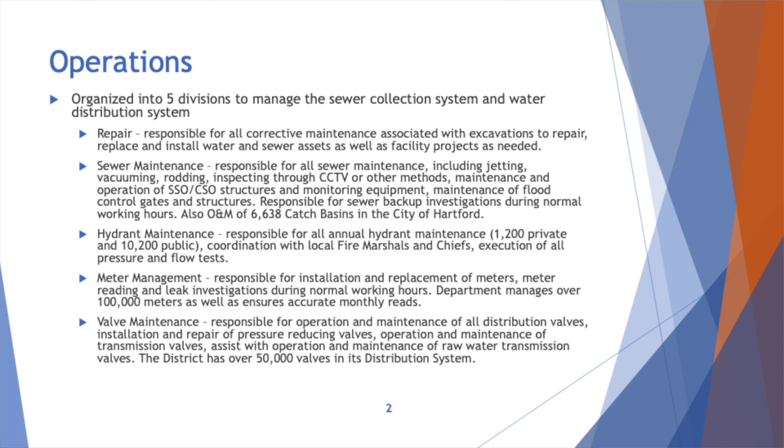Really, this is the critical component to our system. In the event that a break occurs, we need to be able to shut that main down. They play a vital role to make sure we can get access to those valves. And we'll get into some of the repair work they've done and responses they've done, including the 54-inch break that we had to respond to this August on the side of I-84.

So quickly keep going here. Just a little history.

My personal background, started in engineering. I got lucky enough when Scott came on board as the chief operating officer, I took a position within his group. Part of this was he wanted to get a good grasp of what we were up against. This is when we were starting to come into our consent order and consent decree and our long-term control plan.

There was a lot of work being put onto the operations department, and at the time, our engineering department wasn't as organized as it is today. So a lot of this work was being funneled down to operations. We looked at what our requirements are to support the Clean Water Program, as well as all the CMOM responsibilities, which was maintenance that technically we should have been doing. That's how we got into the case with the consent decree and consent order.

Now we're doing it, we're managing it. A lot of operations is actually managing all of our contractors, before engineering took on that responsibility to support operations. So we looked at our pool of all of our union staff supporting this, whether it be technical staff, supervision, and labor staff, and we started seeing we're not going to be able to keep up with the backlog.

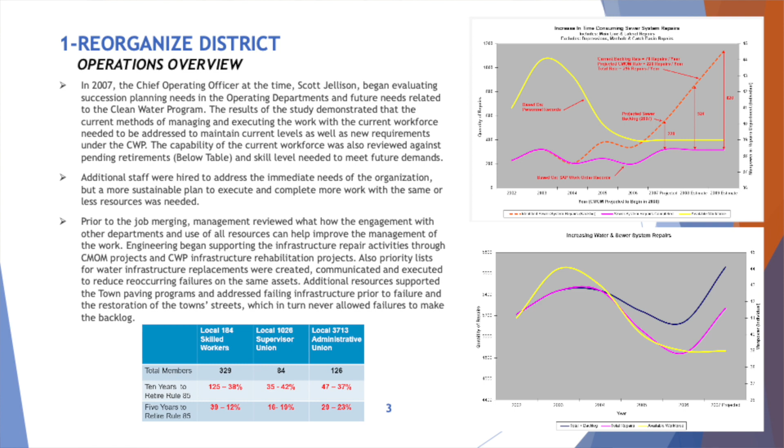So we knew we had to make a change. We did a full evaluation, and that's when we really looked at, hey, things have to change over a period of time. Keep on moving on.

As part of that, we did need to organize our staff. We had 5 divisions - you can imagine we had a sewer maintainer 1, 2, and a crew leader; hydrant maintainer 1, 2, and a crew leader; valve maintainer, gate maintainer 1, 2, and a crew leader; meter maintainer 1, 2, and a crew leader; customer service maintainer 1, 2, and a crew leader. So we had all these job positions that were essentially one-offs, so they could do only 1 or 2 things specific to those types of asset classes.

Under Scott's direction, we began merging those positions, working with the unions, negotiating, merging them into essentially a utility maintainer 1, a utility maintainer 2, utility maintainer crew leader, truck driver, and equipment operator. That's how we function within operations today. Every single one of those utility maintainers can do all the work within those 5 divisions in operations. Recently we brought in the command center as well, so there is a 6th division, but it's in a separate department.

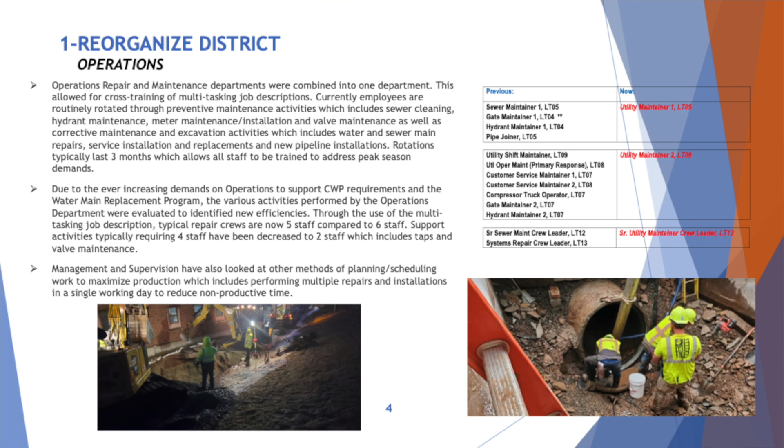When we moved forward with this, it was a substantial effort to get what we had - specific people working on hydrants - but they took the opportunity to expand their career, promotional opportunities, potential for pay increases. They moved forward, so we set up training programs to get every single one of those employees on track to take on those new skills and abilities.

Right now, what we end up doing, and it seems to be working out well - I talk a lot with a lot of the new hires - we put them on essentially a 13-week rotation. They go through our repair department for 13 weeks, learn the repair group, then they go on the maintenance side, learn everything about maintenance, and we keep them fresh.

In an event, we always pick up - like right around now typically, I'll knock on wood, we have a lot of water main breaks during the winter - so we have to fluctuate whether there's more crews available in the repair department versus maintenance, and some maintenance we can't do during the winter. So those are the types of things that we're always trying to work on, balancing the workload with the staff that we have.

Specifically, just recently, probably in the last 2-3 years, when John Fleming took the manager of operations role, we went through about 45-50 unique processes within operations, different variants. We looked at each one and said, is there a better way of doing this? We met with supervision and said, can we take a repair crew from 6 to 5?

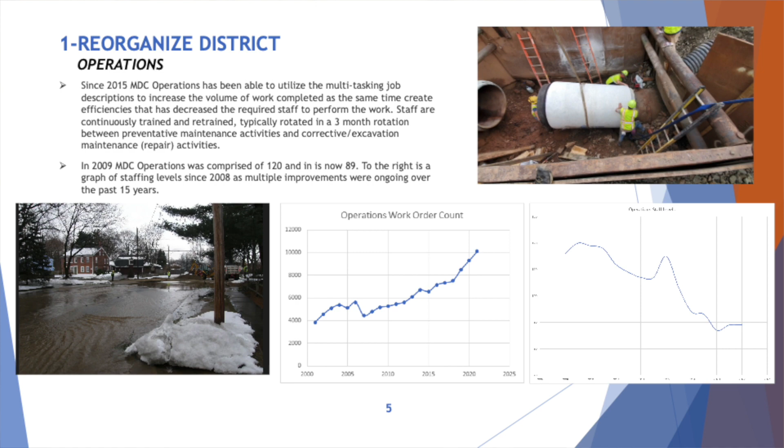We'll get into each of the divisions right after this, but I wanted to show this. As part of that, we started tracking the number of work orders pretty regularly. When Scott came in, part of that management study was to go back and take a look, and we've actually been able to increase the amount of activities we've done year after year, meanwhile driving down what we actually need on staffing. I think we've come to a point now where this is it - we're basically maxed out on how low we can go. Just wanted to bring this up as sort of a reorganizing.

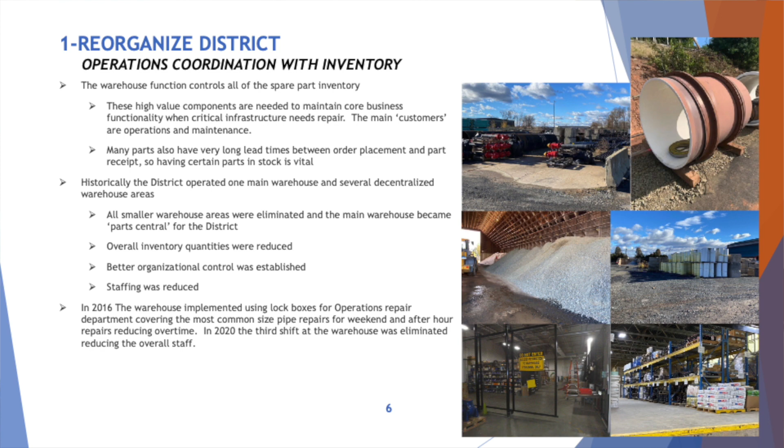Operations can't do this all alone, and we'll talk about the extensive coordination with engineering as well as the maintenance staff. We support, just as they support us, the plant maintenance department on our pump stations, whether it be sewer, water, or our storage facilities across our distribution system. One of the other areas is plant maintenance and the inventory group within maintenance. We've had a lot of challenges since COVID, and previously to that, we've made steady improvements on how we make sure we have the right materials to tackle the jobs we have, without the added challenge of our accelerated water program too. There's a lot of coordination between operations, our inventory group, and engineering to make sure this happens.

I mentioned failure events and responses, and I put a couple pictures in here. Again, it's 24/7 - we do have a department that is 24/7, our command center. They're the initial response, they do the assessment and make sure the right crews are coming in to address it. I put a couple examples in there - the top one was a liner failure. If we could run the video just real quick, just to give you an idea.

This is what the water was looking like. This we identified when the liner failed. These are our cameras going in and assessing the sewer at this location. These are our staff putting a camera device down the sewer, which is essentially like a remote control car with a camera on it. They can go up to it and assess what the damage is. We were using this tool out Friday night on Vine Street, assessing what the issues were, so we know how much pipe repair we have to make, what conditions we're facing, and make sure we're bringing out the right material to address it.

Hugely important - this one is our response, our assistance with a DEEP contractor following.

Recall, I believe it was end of June, early July, Connecticut Airport Authority had a PFAS release in one of their hangars, basically a fire foam release that filled up the entire hangar. It drained to our collection system in Windsor and reached the Poquonock plant. We were assisting DEEP's contractor this time, in the middle of the night. Our staff was out there with DEEP's contractors trying to assist, opening up manholes, making sure their equipment was there, as well as our treatment staff working 24/7 at a one-shift plant to make sure there wasn't much PFAS getting through. If there was a way to work with the DEEP contractors, we were there.

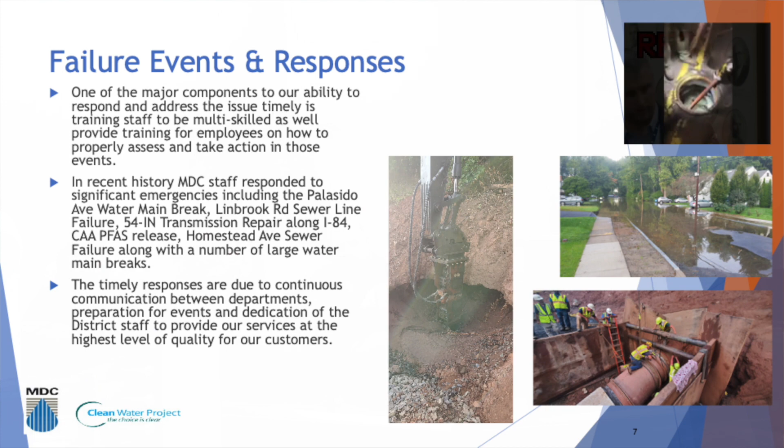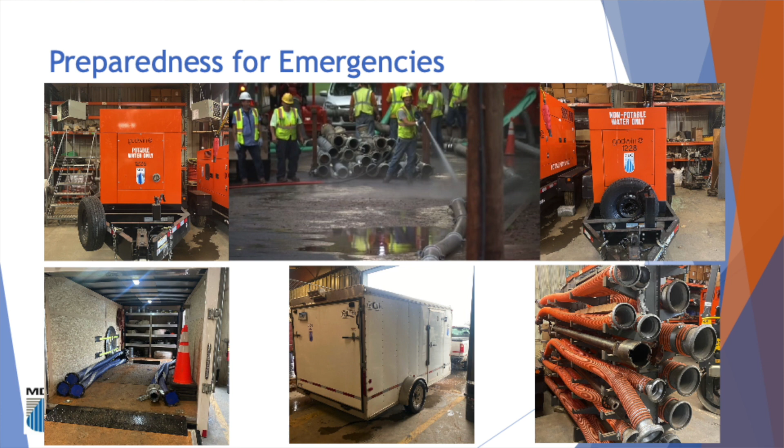This slide here shows some of the things we have available to us. Frankly, there are other large utilities in Connecticut, water utilities, that call us to address some of their emergencies - they're not prepared like us - as well as the engineering behind how to bypass a pump station. We've gone out and assisted with this, whether it's a large pump to bypass one of their pump stations, the pump on the left.

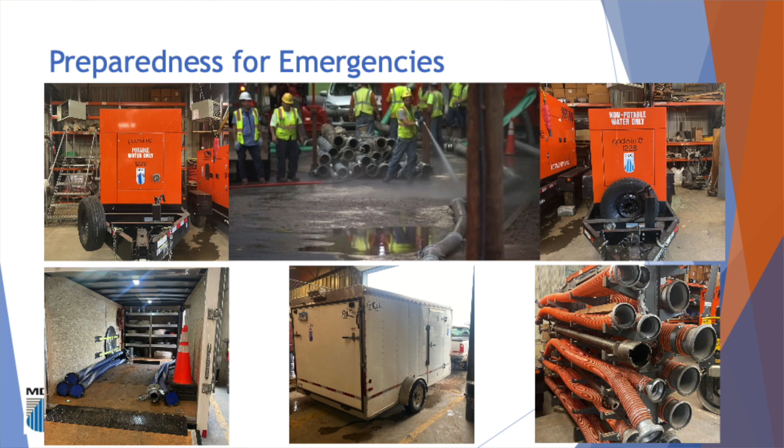We have a hosing kit, and this gets into some of the improvements we've made - we cleaned up all our trailers, made sure we have the right hoses, everything's easy to find. That's one of the trailers there, and the top right. We're able to quickly deploy those. This is a picture actually from the afternoon of the first day of Linbrook - we have the street pump down, the bypass pumping set up, and we're essentially cleaning the street at that point. So this is the response our operations department has in emergency events.

One of the things brought up in the management study was how do you measure performance. That's something I've seen since I've come to the district - it's steadily improved. It really wasn't, especially in operations, but since I started working for Scott in 2008 into where it is now, things have changed significantly.

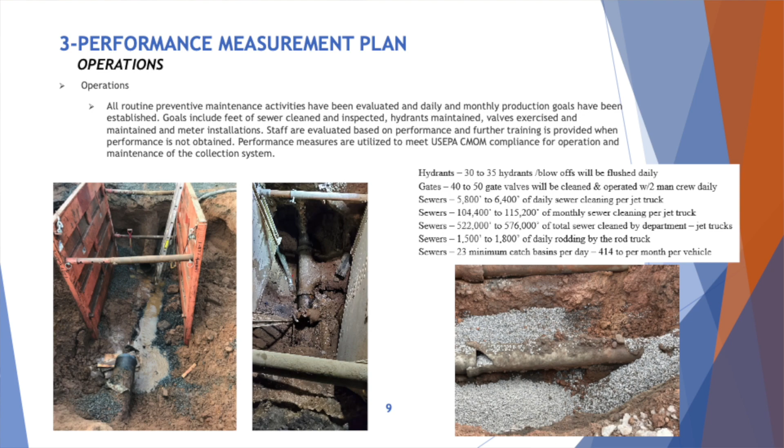Some of the high level things we do on the maintenance side - specifically having hydrants to run a flush on a daily basis, and sewers having cleaning we need to do with a jet truck, TV inspections, catch basins we want to touch a day. These are requirements we've identified - things we need to do to maintain our system. There are also pipes we touch once a month, certain pipes we go back to because of debris, grease, and what's being discharged into them - those are our frequent pipes we have to go clean. We set these metrics to meet our regulatory requirements, but also to make sure we're doing the right work at the right time and can ensure it's getting done. I'll go through some of these - I hope it helps.

In this case, it's operations repair, but Pete and John helped me go through what we track. Carol Barber's been doing this job ever since I first met her, tracking water main breaks for us over the years. But what we want to do, and some of this is what we're doing with the accelerated water main, is not make the situation worse.

So we saw a steady increase over the years of water main breaks. So we went through and put the investment in to replace water mains. Right now, we're at a good place where the number of breaks are basically flatlined. We'd like to drive it down, but it's flatlined right now.

So these are some of the photos. This picture on the top left is our guys repairing the 54-inch water main along I-84. Matt and Pete are in the bottom picture in front of McDonald's. That's East Hartford, Burnside, by the, Manchester line. And this is a picture of our guys cutting a pipe after a break.

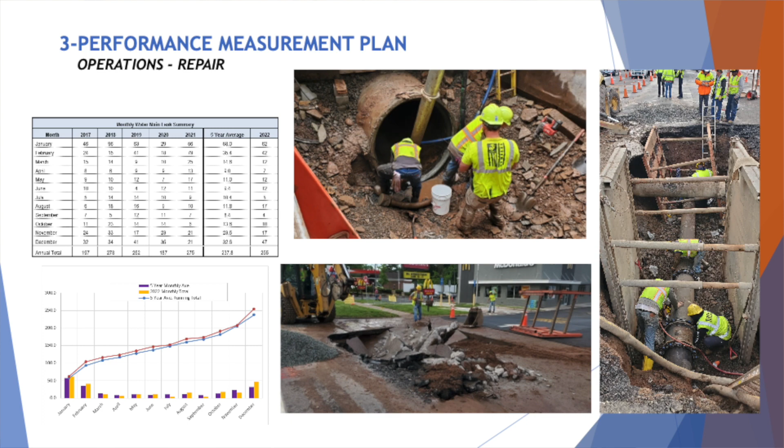This could be, I don't think it's Burnside, but this is when the pipe actually breaks. We have to take it apart, put a new piece in and connect it. This typically happens within 6 to 8 hours, and all the customers are back on afterwards. So we want to turn these things on, especially on busy roads like Burnside. These guys get a lot of credit for that.

We also do the repairs on the sewers. Again, we track new services going in, and you can see over the years, ever since the accelerated water main, operations has this new challenge of not only supporting the work we have to do to make sure our customers have sewer service and water service, but now we have to support our contracts, so we're putting the water mains in.

So we've gone from, sorry, I can't read the numbers, about 200 a couple of years ago at taps, now we're over 1,000, pushing 1,300 taps a year. And that's with our staff, we're finding different ways of doing it. I remember when I was first in operations years and years ago, it was over a 4-man crew.

I was on 2. Let me explain a tap. So we put a new water main in. I didn't do any tapping quotes or anything, but we try to bring as much show and tell as possible. So when the new water main goes in, there's no penetration to that water main. So we actually have to drill, basically a valve that sticks in there, and that's the new pipe outlet that services that house.

And we have to extend new copper and reconnect to the old. That's essentially it, and we're going to get into what that looks like more when we talk about the meter pits, but that's really it.

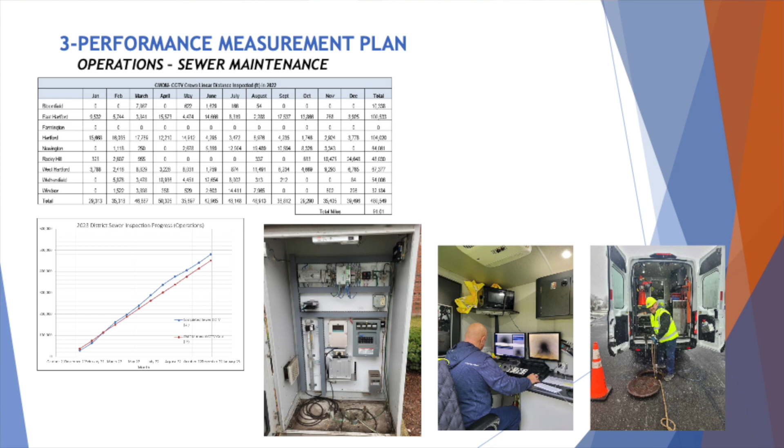We saw a video of the pipeline collapse, but this is our staff, well-organized trucks, great equipment. We've gone through multiple iterations of different vendors for this, but set up a routine now where we can quickly get out there. We do have issues with equipment, quickly swap it out so our production stays up.

This group also is responsible for our CSO, SSO cabinets. So all the regulators we have in our system, we have to measure what's going over those. And I'll back up a little bit.

So our CSO structures are, when there's a heavy rain event, a wet weather event, on a dry day, all the sewage, all the domestic sewage goes to the treatment plant. But on a really heavy rainstorm, all those catch basins are connected to the combined sewer. All that water gets in, there's not enough capacity. So there's overflow structures, basically relief structures that say, all right, now it's starting to rise, so we don't back up homes. It's going to go over here, go into a drainage pipe, and goes into a water body. So that's why we have our consent decree and consent orders to limit that as much as possible, with certain standards.

So we need to measure that, and that's what Dean and Tony's group does as well. Their staff goes out there and maintains all that instrumentation. So we basically have control boxes on corners of certain streets, intersections, sides of streets, that house all this equipment, and we can get this equipment in real time, or get this information in real time when there's a problem in our system. We also use this equipment to monitor our system as well.

What we were able to do was identify that our biggest issue is the larger debris. The leaves and the sand, the grit that comes into the street, that's all going to go through that grate. But what we want to prevent are the bottles - if you look at the catch basin, there's an inlet on that curb, and that's what we were preventing with those grates, to block that. So the water, sand, and grit can still get through and we can manage that, but it was the bottles causing an issue, similar to what we're seeing in the north end of Main Street as well.

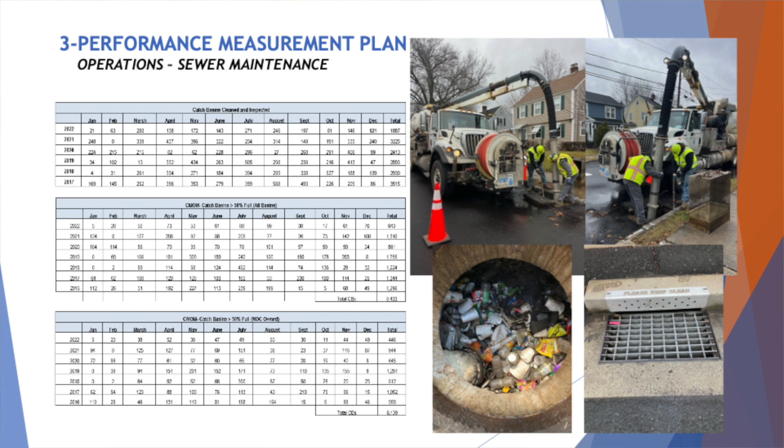Chris and Scott, I think the city has done a better job - since we started, about 2 years ago, the city has done a very good job cleaning Albany Avenue, which has been very helpful, and the side streets too have improved. These plans also alert the city DPW that trash doesn't just disappear - the catch basins aren't trash cans anymore, and it allows them to visually see trash building up against these catch basins, so the street cleaners can go out there.

Now this is in conjunction with the Greater Hartford Flood Commission. The MDC has a number of outlets that go to different water bodies, specifically the Connecticut River. So the MDC has put together operations flood control procedures - this is an association where MDC leads us with the city of Hartford on the measures we have to take as the Connecticut River rises.

I forget exactly, it was about 20 or 30 steps between the MDC, the city of Hartford, and other entities that have to be performed so the Connecticut River doesn't come back through and flood parts of Hartford. So we're closing gates, and that flow gets diverted to some of the pump stations, the flood control pump stations. These are specific steps we follow - we'll talk more about it at the command center, but we initiate those, and our operations staff goes and performs all these operations as well as maintaining these large gates.

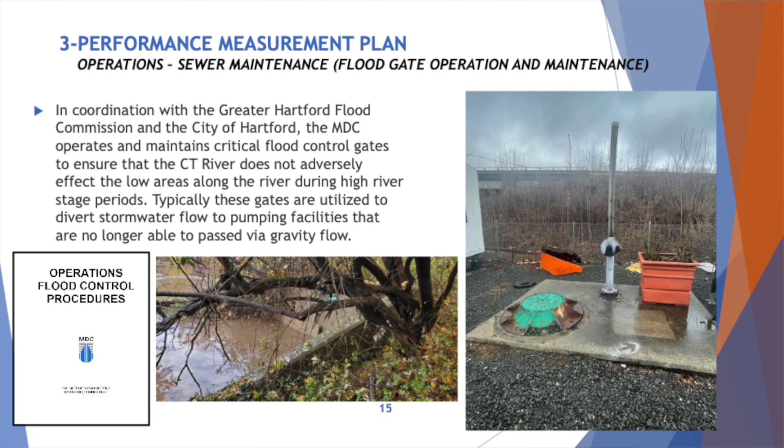Hydrant maintenance - again, 10,200 hydrants that we do. This is how we measure it, we're already at every point, and as you can see there's a lot more maintenance activities than just hydrants.

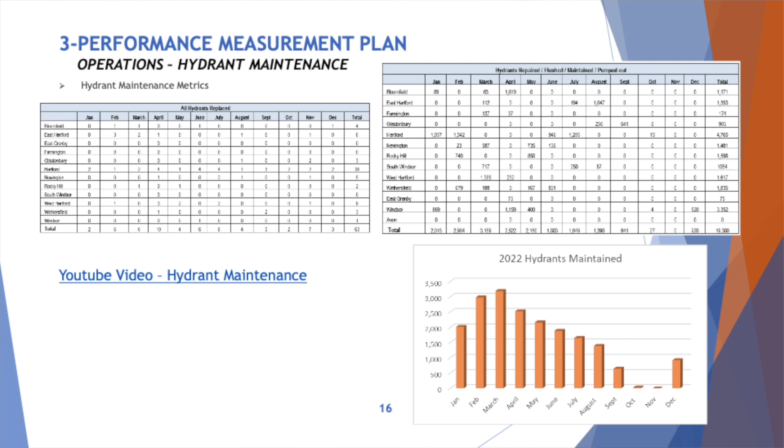Within the maintenance group, a sewer maintainer could be doing sewer maintenance work in the fall, and come spring they're out there flushing hydrants for us. So we're multifaceted - we could take staff doing one thing, and the following month they're doing something else. This is somewhat of a seasonal opportunity, and we see fluctuations in the numbers, which showed us what we really accomplished with the combination of those job positions - maybe 8 people in the hydrant department through consolidation. In some cases we're doing zero activities that month on certain hydrants, so now we're taking those 8 individuals and applying them somewhere else where the work is needed.

So this is how we measure it, and this is continuous every month - we're putting these numbers in, seeing how we're doing against our goals moving forward.

I will see if I can.

So hydrant maintenance serves two purposes. It cleans the pipe, it scours the pipe, and it provides a water quality benefit, but it also makes sure that hydrant is available for fire protection for our communities, fire departments, for any emergencies that might occur. So it's very important. It seems simple, and it is, but it is a very important part of our responsibility.

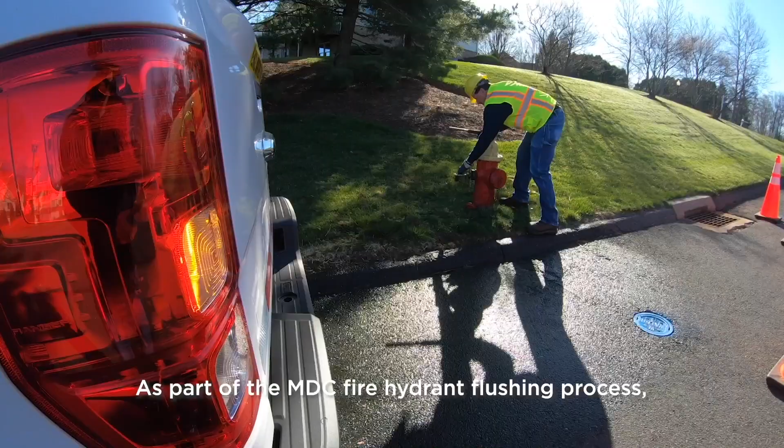That's done almost 13,000 times, including private hydrants, on an annual basis, that same exact activity.

What it allows us to do is also, this department, our staff through Command Center organizes the meeting for us, and our staff present. Recently with COVID it's been sort of like in a 9-month period, but what we're trying to get back to is a semi-annual meeting, prior to COVID, with the fire marshals and the fire chiefs, going through some of the issues they have, as well as some of the things that we're doing. So we're continuously changing our operations, different things that we're doing, whether it be hydrant locks.

This group goes out and investigates potential theft from hydrants. Water is important, right? A lot of contractors use it, landscapers. So what we're always attempting to do is find where those sources of potential theft of our water are.

What we've done, and it was a huge improvement, was about 8 years ago we put a bulk water machine at our operation. So any tanker truck, the pool water fillers, can all come into our operations area.

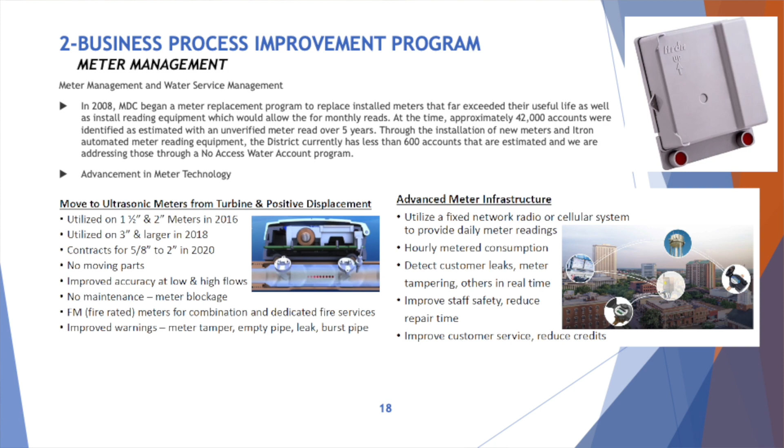To give you an understanding on the technology, previously we basically had a mechanical meter. As water went through, it turned something, and that ended up changing a dial. Right now, we've upgraded our technology to ultrasonic, so there are no moving parts. It uses a frequency to read how much water is passing through a fixed area, and we get much better accuracy. Customers get much better accuracy in billing, and the older meters were actually reading less. So in some cases, it's improving our district and our rates, as well as accounting for water more accurately—what leaves the plant should be captured at the customer's meter.

We're also moving towards our advanced meter infrastructure, which will be covered at the next Water Bureau meeting. This builds on what Scott started in 2008, where we have radio frequency devices that require a vehicle to drive by. There's no more sending in a card with your meter read information—that went away. Now we can drive through a neighborhood and get automatic reads. That information comes back, populates our billing system, and the bills go out. This new system will allow us to get real-time reads of all our customers through a fixed network and a cellular network.

The best part of this is we'll be able to detect when someone has a leak. So in the middle of the night, say 1 in the morning, if someone's using water consistently—maybe a gallon an hour from a dripping toilet or tank—we can send out a notification. We're also going to have a portal for customers to go in and get this information so they can better manage their water bill. Great improvements on that, and we're looking to push this out later this year. We'll have a longer conversation about it at a Water Bureau meeting.

Maybe this is a good time, if Scott you're okay with it, to do a show and tell of what a meter pit is. Yeah, let's do that. JP, Matt, if you guys want to help me out.

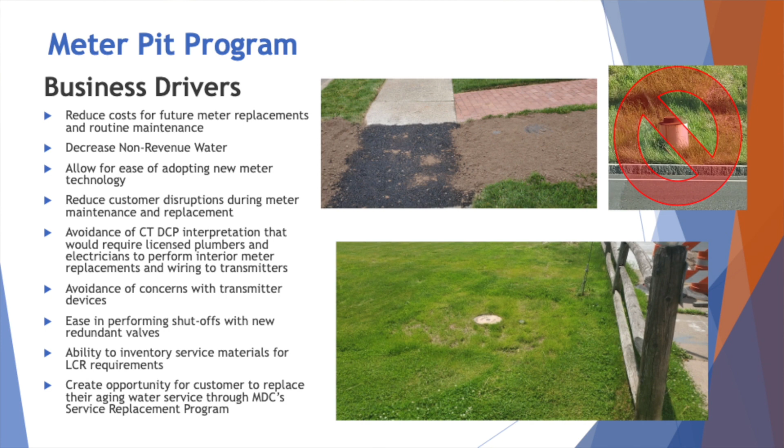Jay, you want to talk about how you guys work with the homeowner to pick the location of where you put these? So basically, this is going at property line on every house. Right now, every property has a shut-off valve at street line or property line, we call it, so that is the shut-off point. If there's ever an emergency or a leak inside the home, Jay's guys or our command center guys in the middle of the night can access that and shut off the water. So this is getting installed right behind that shut-off, that access valve. Typically it's in the front yard, if you have a sidewalk, it's behind the sidewalk.

We deal with landscaping, we deal with multiple issues that get in the way of where we put it, but every time we put it in, it's going right behind that main shut-off valve at the property line. A lot of these are coming out with direction from our engineering. So if there's a project, maybe a town paving project, we get all the information from the towns for their next year's paving program. Our engineering group will go through and identify all the services that are old, maybe old material that are prone to leaks. We'll identify those services, create the work orders, and the key thing is we're continuously notifying the customer that we have a meter pit program, you have an old service. We also have a program to replace your service, our lien program. We voluntarily lien to go through, basically a low interest rate loan to replace typically if our service is old in the street, theirs is old on the other side of the property line.

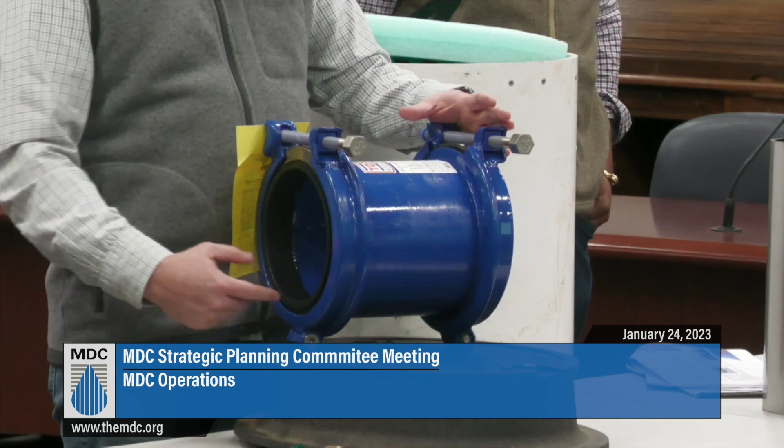So we call this a DP sleeve, dual purpose. What we used to have previously, when we had to make a connection, was a multi-bolt sleeve which used compression going against itself, and that's what tied two pieces of pipe together.

What we've moved to is a 2-bolt system, which allows us to change the size by simply pulling the gasket out. This allows us to have two sizes in one, whereas we used to have multiple size sleeves previously. And it allows us to simply slide it over and ratchet it down.

Rather than trying to get it like on your car - if you tighten the bolts down on a multi-bolt sleeve too tight in one direction on the old sleeves, it would leak again. With this, we have no issues.

And what it does also is hold the pressure of the pipe on this single band rather than compressing out. It's held tight. So these have saved us countless hours in the field.

So in the case of a real bad blowout of pipe, we have to replace sections of pipe, which could have taken us a couple days. We put these sleeves on both ends, put the pipe together, and we're having that thing back together in 6 hours.

And that includes the response time to make sure we do the call-before-you-dig properly, excavate, and backfill. So it saved us a lot of time addressing it - one, so we can go to the next repair if it's the middle of winter, but also to make sure the customers get their water back on as soon as possible.

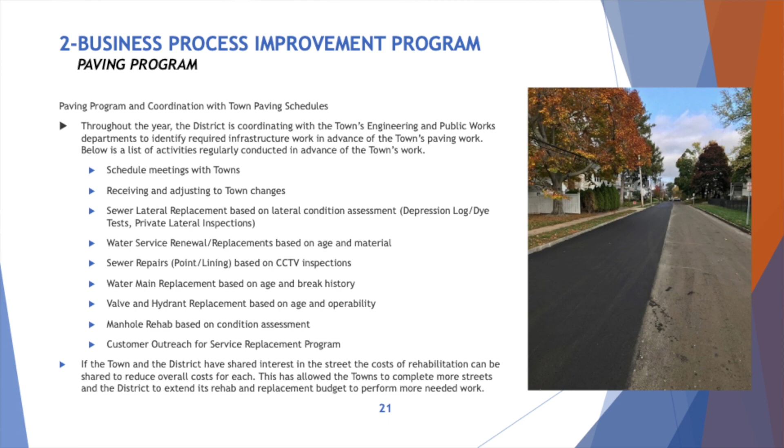There was legislation 2 years ago requiring all municipalities to coordinate with utilities on their paving programs. We get feedback toward the end of the year on what they're doing the following year. We set up a system now that runs through engineering - an engineer is assigned to go through each town's paving program and identify any of our infrastructure that is old or needs replacement, and we find a vehicle to address it. Our operations department does a lot of this work, and we also use contractors to address deficiencies in our infrastructure. Because the last thing we want is for the town to pave a street and then we get a water main break, leaving the resident with a big ugly patch in front of their house. That's a sin for us.

So we'll keep moving on. Again, tightly knit engineering, procurement, ops, and utility services - we've gone through and identified a lot of savings within operations.

Quickly go through - there's some pictures later on - but we looked at how to manage our materials better, so we're not handling materials multiple times. We've actually put bins in the back of our facility at 125 Maxim Road to store material and let it dry, especially the grit. What was occurring was we were getting larger grit disposal fees by directly sucking the grit out of the catch basin and delivering it. They would charge us not only for the grit, but also for the water in it. So we set up a drying facility for all that debris and grit before disposing of it properly through our contracts. A lot of it was 60% water, so we basically cut the cost 60%.

Material procurement contracts involve tight coordination between inventory, procurement, and operations, continuously monitoring our material standards. As Pete and Matt discussed, that blue repair sleeve - we probably didn't have that 5 to 7 years ago. So we're continuously looking at whether there's a better way to do this, through trade shows and other means.

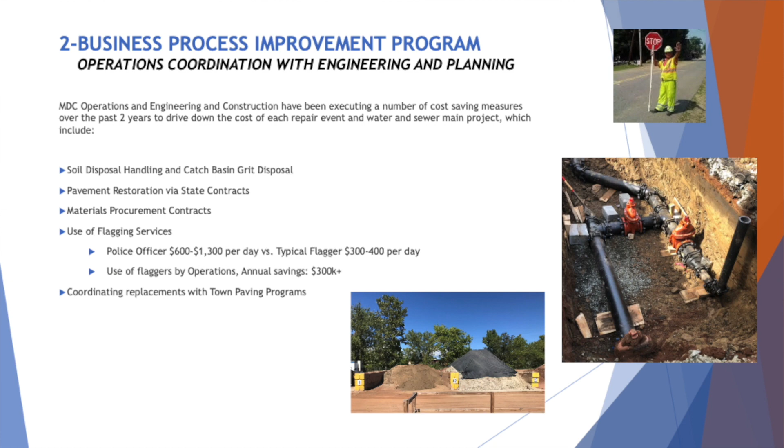And then ultimately we look at whether there are state contracts to support large projects that these folks in operations do. We have some fairly large water main breaks where we're replacing a good stretch of road. We'll look not just to use our contract set up with our restoration vendors, but also to utilize the state contract that gives us better value for our dollar.

I apologize for making a comment. Unfortunately, I can't stay in this meeting, and I'm probably a little out of order, but I would like to make a commissioner comment.

Most of my day job, I spend driving around the streets and managing property, doing construction-related activity. I just want to say that these guys here are what make all the rest of us look good, because they have a great public face. They're respectful, they're organized. I see it all the time, and I want to give them compliments for the hard work they do. If they never get thanked, I want to personally say thank you for what you do for the MDC, because it's a tribute to the rest of us, how good you make everybody look.

I wanted to say that before I go, and especially the guy who directs you all over the place, I think he does a pretty good job too. Dave Ruddy does a great job, and everybody. I couldn't be more proud to be part of this organization, representing you as well as everybody else. So thank you for everything you guys do. I've gone out at midnight, Chris calls me up, and we go out when water main breaks at 10, 11, 12 o'clock at night. You guys are there, doing their job, not complaining, doing what they need to do. So thank you.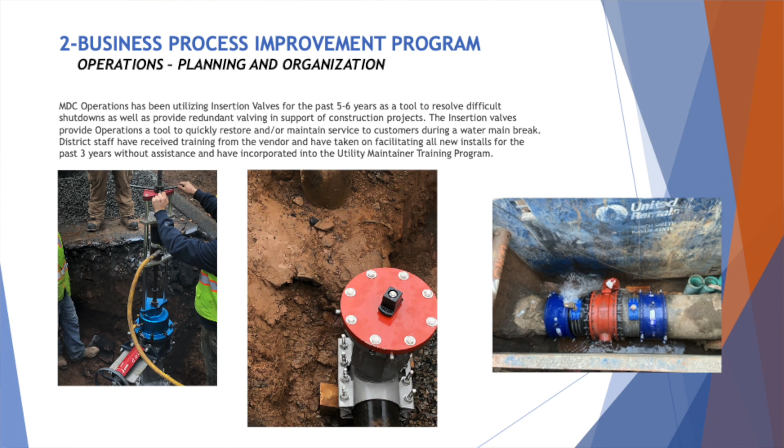That's a main gate or a valve for shutting down a water main. Normally to install a valve like that, you have to shut down the water main, which disrupts service to all the homeowners, and cut in a new valve, which then you have to flush and sample. You can create other problems by shutting down the existing valves. So this valve is put in live, under pressure, on a live main. The picture on the left is the actual equipment, the machine which installs it. It saves us a lot of time and work and headaches, and keeps customers a lot happier because we don't have to shut down the water.

We started installing these. We bought the equipment in 2018. We did 7 the first year. Since then, we've been averaging 22 to 23 a year. So we're utilizing the equipment monthly, sometimes twice a month, installing quite a bit of valves. This is a great piece of equipment. Hydra-Stop is the company, out of Chicago. They're actually using us as a reference for other customers and in literature that they're sending out. They've been a great company to deal with.

So in this case, if we had all the money in the world, we would be replacing all the trouble pipes. But in advance of getting that funding supported from the board, I'll use Silas Deane Highway as a perfect example. We have a lot of important customers there, a lot of businesses that need to stay open. What these operations have been able to do is strategically install valves, so when we have a break, we're closing these valves down and may only have to isolate one or two customers, not the entire stretch between intersections.

We've used these a lot in areas around hospitals and critical facilities. It's paid dividends for us, because when you put it in, guess what - the next day you're going to get a break there. We've seen that occur where we've been able to react, go in, and since we know we just installed the valve, shut it down, isolate it, reducing the effect to our customers.

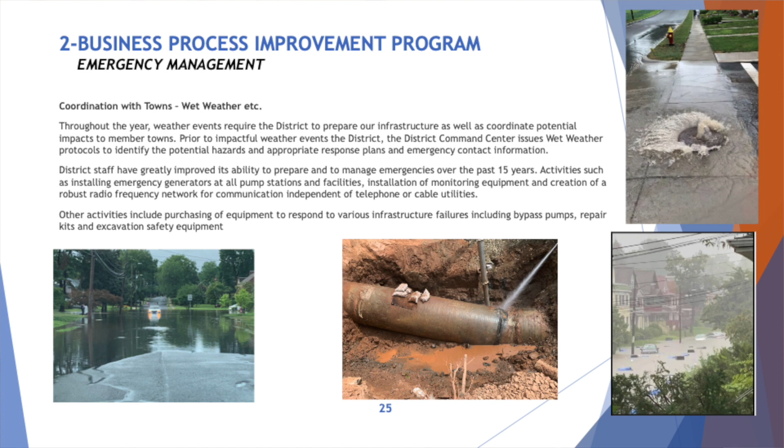Wanted to bring that up, along with a couple photos of things that happened to us. The photo on the bottom right is Whitney Street, I think from the August 19th storm pipe - it's the 54-inch on the side of 84. Bottom left is in West Hartford. Not sure about the top right, but that's obviously a wet weather induced overflow at a manhole.

So a lot of stuff here - this is one of the business and product cost accounting operational services Scott mentioned, you can't really see it, but I highlighted the ones. This was a slide we worked on with all the departments as an evaluation for the management study - right-sizing meters, AMI, AMR. These are all trying to get the right product costing, lower costs, but also make sure we can track costs and get the right rates when we bring them to the board annually. Fire service fees, account validations, making sure we're billing the right charges for fire service - a lot of work goes into this with other departments supporting it.

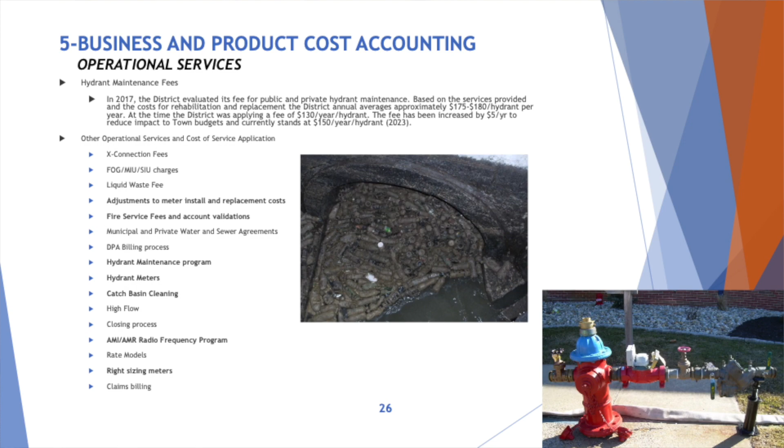Workforce planning, try to go through this as quick as possible. Our folks use a lot of digital tools, so a lot of technology gets pushed out. Our ERP system, SAP, that's where basically our work management system is. All our work orders are run through that system. That's how our work gets managed.

We are developing a mobile tool to bring that out, so it allows us to do more recording, more cost accounting associated with our labor. Also, our materials management runs through SAP as well, so every time we go out and make a repair, if we take a brass coupling out, one of those repair sleeves, that's going on the work order, so it's managing our inventory counts, but also costing on the work order is appropriate as well. And it allows us to know what we have in inventory, so we can reorder.

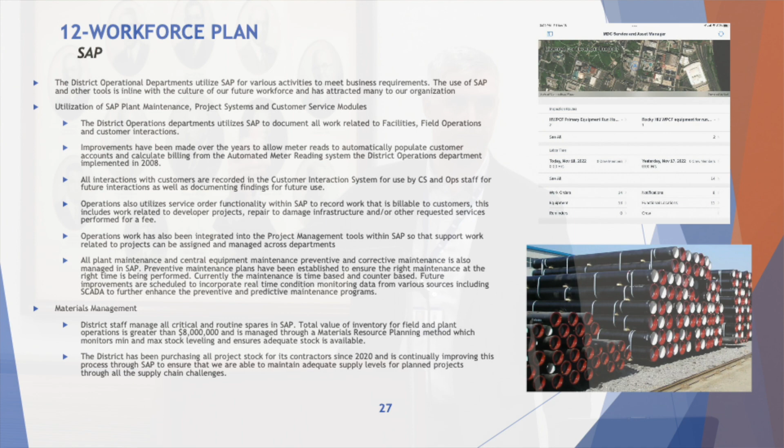So it's sort of a well-oiled system, but I also want to bring this up. We're heavily used, and this is our next iteration to developing the tools for the future of the district. Scott gave us a challenge about a year and a half ago to say, how do we take our record drawing process down from 2 years and give me something better? I think we got something better, and we're presenting to Scott in a few weeks. We were able to take a 2-year process of when we finish a water main, make sure all the records are done, everything's in the right folders, and we could look it up. It took 2 years. We got it down to 2 weeks now.

Part of that is what we are doing in engineering, but also within operations. Every time we go out and make a repair, we're taking GPS coordinates of where we made that repair, so our records are more accurate. Historically, what we've been able to do is do a field sketch, draw the infrastructure that we changed, and then take basically a cloth tape measure and do swing ties, what we refer to it as, measurements off other existing assets, so we get a gate valve, a hydrant, those type of things. So those are fairly accurate, but not as accurate as the GPS, which is basically sub-inch accuracy, both horizontal and vertical. This is, I have to say, what this group in engineering have been able to accomplish.

I have not seen any other utility do exactly what we're doing. This process is very lean. In fact, we're presenting to Scott before we present to some of our trade groups as well, this exact process. But this is really important.